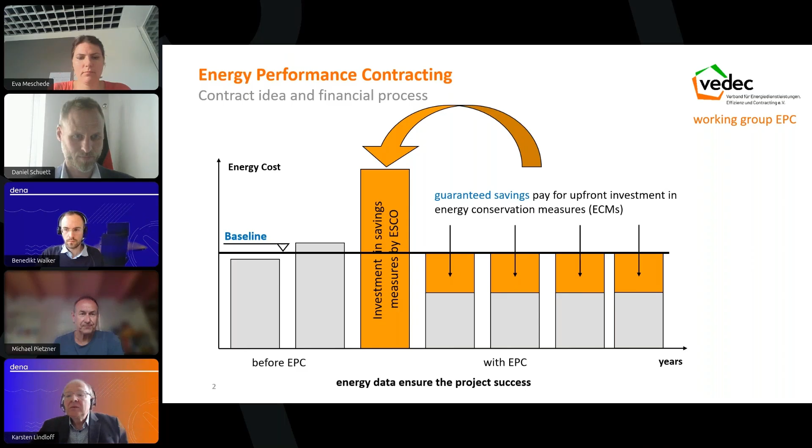And once the contractor has implemented his ECMs, he needs to provide energy reports to show that he has achieved a lower energy consumption and subsequently reduced the energy cost. And in this way, energy data are a very important part to ensure the success of an energy performance contract project. So in general, energy performance contracting can be a tool to implement solutions in accordance with the energy management process as described in ISO 50001.

Which is a clear path and guideline to plan and implement energy conservation measures. It's an organizational process, and for me, one of the benefits of this process is that it is clearly highlighted that it's not only the technical staff of the facility that needs to implement this process, but also the management that must be included in the process development. And I think that's the one part that ensures the sustainability of this kind of process.

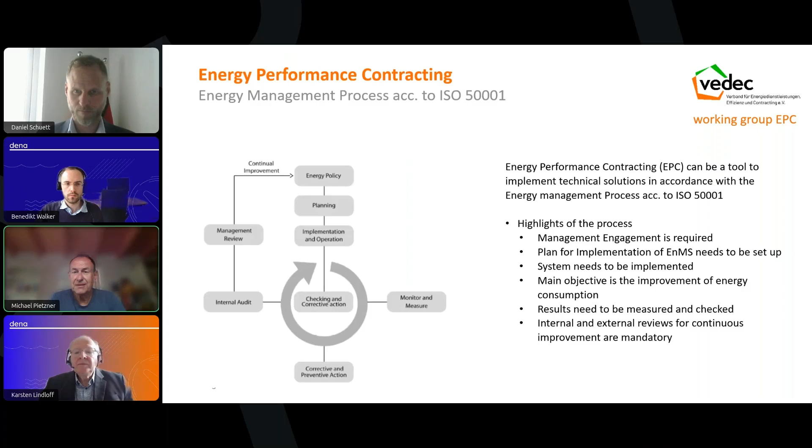So energy performance contracting is also making use of the PDCA cycle of the ISO 50001. So plan, do, check, act. So the contractor comes in, does a study, plans measures, implements the measures, trains the personnel on site, the facility management people. Afterwards, he has to check whether he has achieved the goals he has set for himself. He needs to take corrective action if necessary. And on this part, energy data are a very important part to see whether he has achieved his goals or not.

In some cases, he might also be able to take preventive action. And afterwards, he can see if he can optimize the process, if he can further reduce the energy consumption, and that's the main part of this cycle. If I look from a customer's perspective on an EPC project, the situation shows itself as follows. As a customer, I should have knowledge of my energy baseline and existing situation of the facility, of the equipment installed. I should know technically and energetically regarding energy consumption and energy cost, where I'm standing.

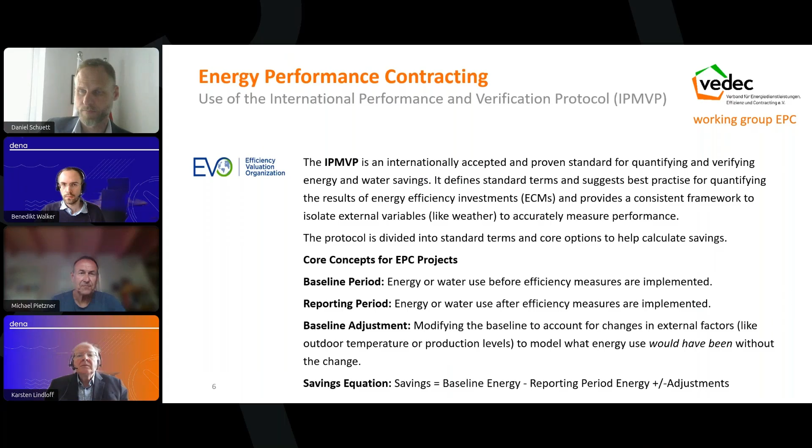Basically, the IPMVP provides 4 options for measurement and verification. I'll go quickly through them. Option A is key parameter measurement, which combines engineering calculations with spot measurements of key parameters. One of the simple cases where it could be used is a lighting retrofit. Now, I implement maybe thousands of lighting panels in a facility, and I can't provide a meter for every lighting equipment or every rack where lighting is going. So I could make a spot measurement of the lighting panel. If I have implemented, for example, LED tubes which should have a power of 18 watts, then I can make a spot measurement to validate that the system really has 18 watts.

And to define the energy savings in kilowatt hours, I can use historical data on how many hours the lighting system will be in operation throughout the year, based on whether it's 1 shift operation or 2 shift operation, and whether I have daylight influence in the facility or not. Then I can put in the figure of how many hours per year the lighting system will be operating. So it's an estimate based on data and engineering judgment. Subsequently, I can multiply the wattage with the hours, and then I have the savings in kilowatt hours.

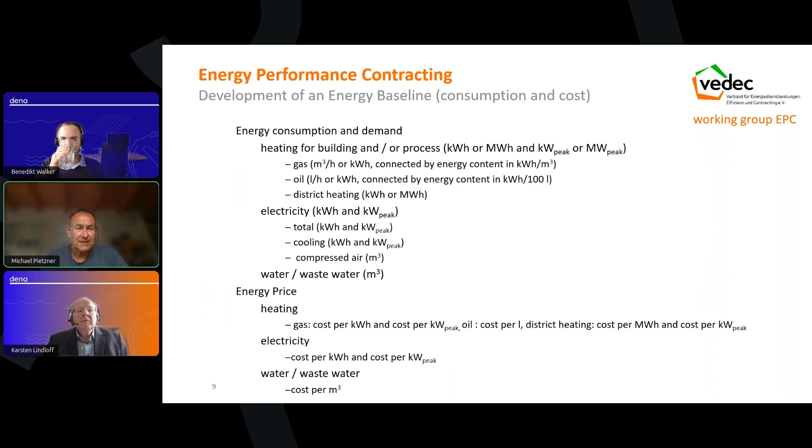And besides heating, I usually use electricity, and in the baseline yearly, it's interesting to know the total electricity consumption, and in some cases also which part of the electricity consumption goes into cooling, which into compressed air. And there might also be a project where water or wastewater could be a part of the project. Subsequently, I have energy prices for heating, consumption and demand, electricity, and water, wastewater.

So if I develop an energy baseline, some general considerations for the beginning. Data need to be for a specific period, as already discussed. So basically, it should be for a year. When the consumption of several years varies significantly without known reason, the average of these years could be taken. In the beginning, data should be available at least monthly. If not available, annually will suffice, but the more detailed the data are, the better the situation is also for making savings calculations for the ESCO.

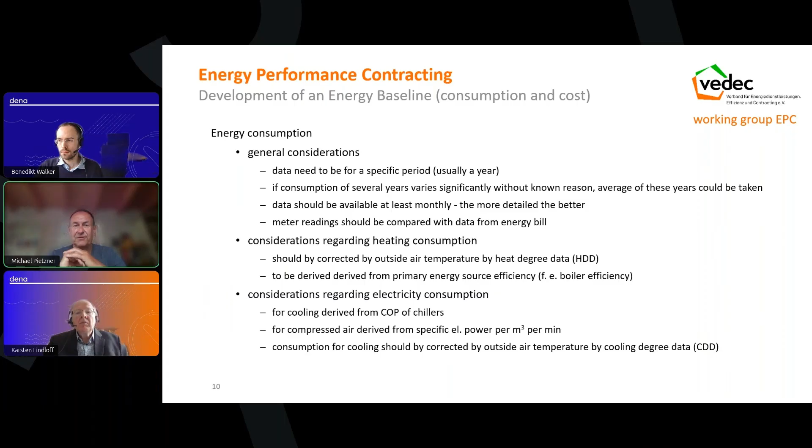And if I take data from installed meters, I should always compare them with data from the energy bill to validate that my meter readings have been correct. Regarding heating consumption and cooling consumption, data should always be corrected by heating degree data and cooling degree data to ensure that I can compare data of one year with future data for another year for the savings.

Well, energy demand, if it's applicable, should also be taken into consideration for a specific period, and these data could be derived from the energy bill or could be read out from installed meters if there are any installed, and you have insight and access to the meter.

The energy prices, from my point of view, to build the energy baseline could be derived from the latest energy bill and then should be used to build up the energy baseline by multiplying consumption or demand with the cost. And these energy prices should also be used to determine the energy cost savings by the ESCO, so that changing energy prices don't have any influence on the energy performance contract.

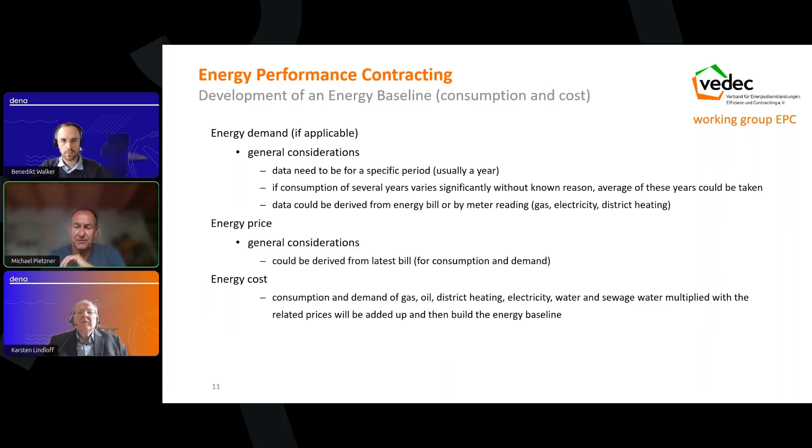If I develop an energy baseline and want to determine further savings achieved, some thoughts up front. Are submeters for systems already installed in the building? Does a building management system or energy management system collect the data and store them? The question should also be answered: where are meters installed and what do they measure? And is a meter scheme available?

Well, because submeter data help build a solid baseline and enable us to calculate and estimate more accurate savings. And they also ensure that an ESCO cannot overestimate his savings. And if no submetering is available, then the ESCO should develop a methodology to determine his baseline for single measures like air handling units, to have a solid baseline for estimating his savings.

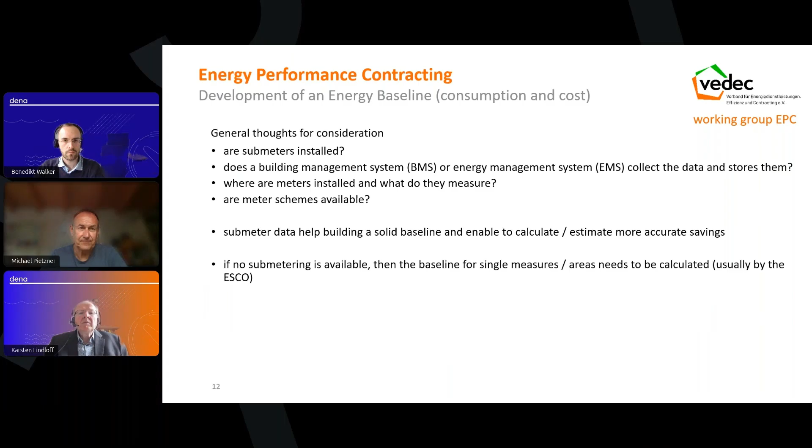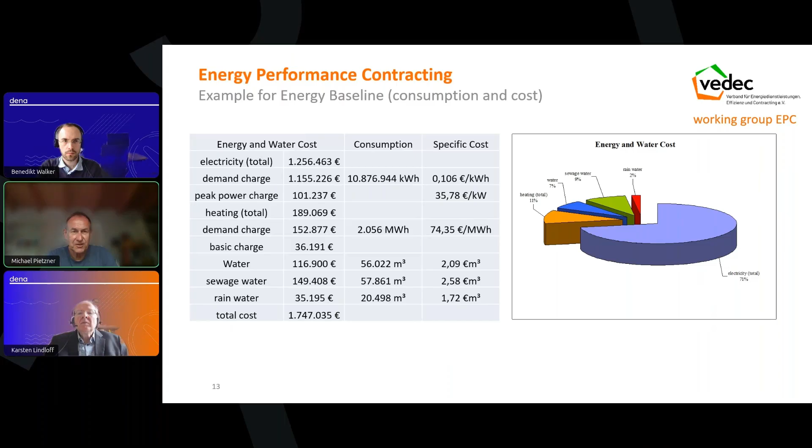But the question is now, where does the energy go? If I talk about electricity, this is another example, not the same facility, but now I'm looking from the perspective of an ESCO, and I would like to know where the energy is going, so that I can see where I should start with thinking about energy conservation measures. Well, in this case, we have tried to determine where the electricity is going.

So in this case, quite a lot of air handling units are operating. I have a compressed air system operating. I have a lighting system. I have a cooling plant. I need electricity in some cases for heating. I have a commercial kitchen in the plant. There is some consumption going into social spaces. And I know that basically nearly 50% of my electricity consumption goes into production.

So, if I'm not a very specialized ESCO, I usually won't go into optimizing production machines. So my area of operation would be handling units, compressed air, maybe lighting retrofits. Maybe I can do something on cooling too, but it will not have a very big impact. But I now have a clear idea in which areas I could try to implement energy conservation measures.

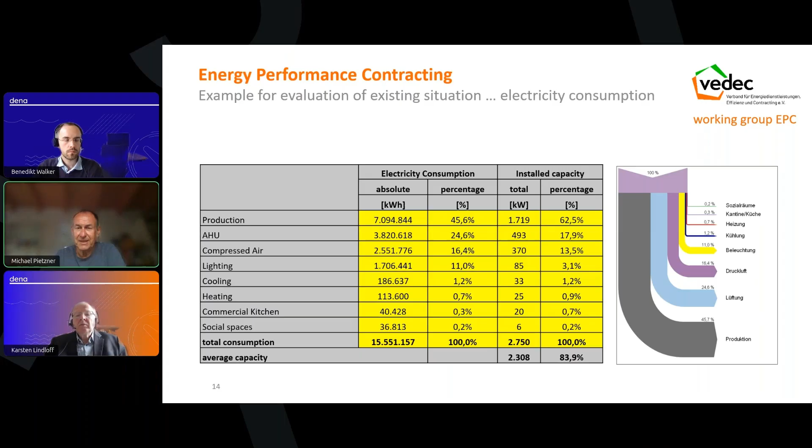And also, I would like to know not only my annual consumption. I would like to know at least the monthly consumption, so I can see is there an influence. I could see, for example, do I have much electricity consumption only in summer, or is it more or less constant throughout the year?

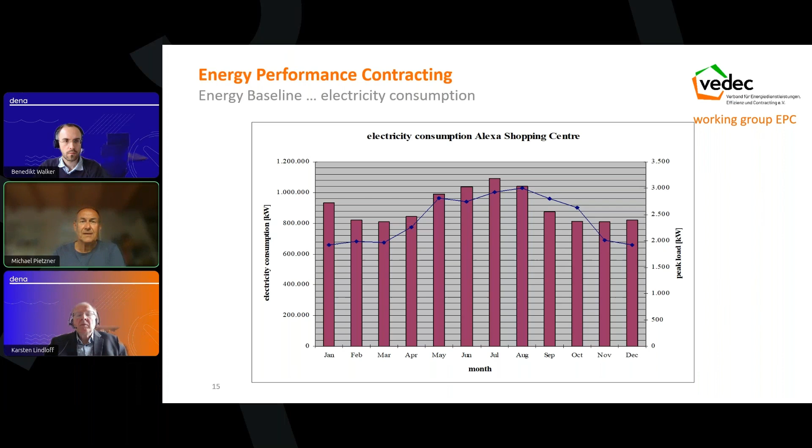And also the load curve, which in Germany can be achieved by asking the energy supply company to provide these 15 minutes data. I can also evaluate them. And in this case, we've tried to put them into context with a number of customers in this shopping mall to see if there are any interdependencies between these two parts.

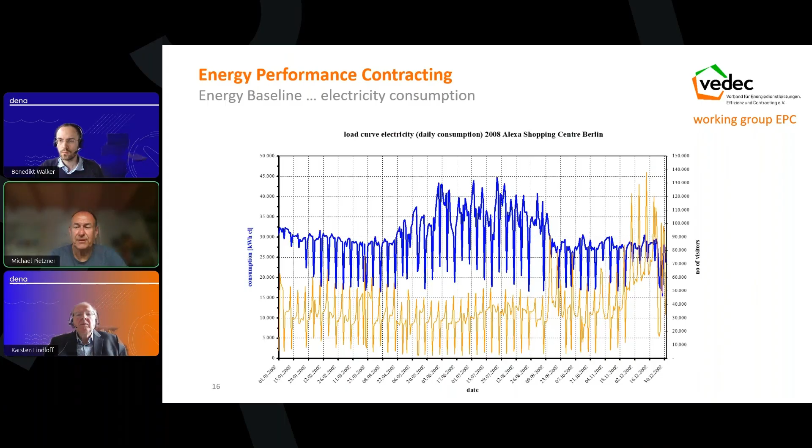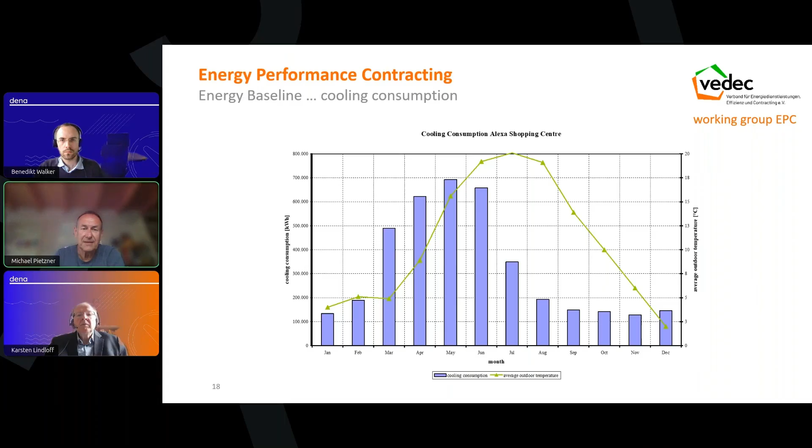Regarding cooling, I can also make a comparison of outside air temperature and cooling consumption. And I need to ask myself, why do I have a higher consumption in May and June than in July, where I have the highest outside air temperature? What's the reason behind this? Is there a need for adjustment of the control systems, or maybe is there a dependency on the number of customers in the shopping center?

And I need to collect supporting data for developing ECMs and saving systems. I need to know what the data of the central cooling plant, of the heating plant are. So what is the installed capacity for cooling, for heating? What are the operating times of the building, of the areas supplied?

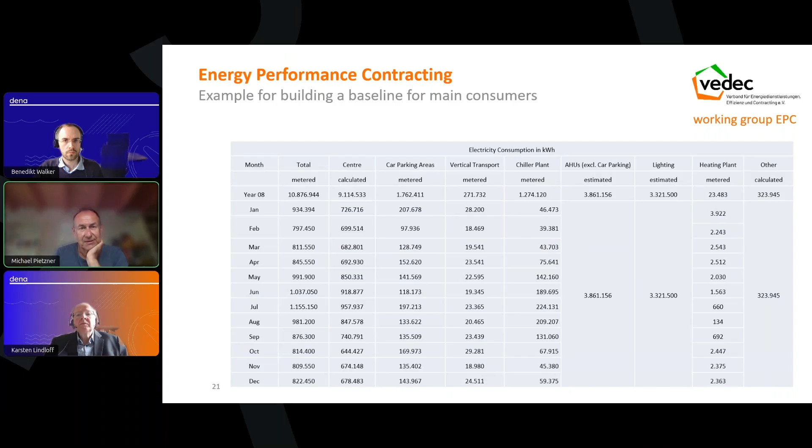And to build up a baseline for main consumers, we have collected a lot of data. In this case, some data were metered, some data had to be estimated. And subsequently, I can see where my energy is going, as already discussed, and then can decide where I should start looking for energy conservation measures. And if I visualize this, it makes things easier sometimes because I can see where the energy is going.

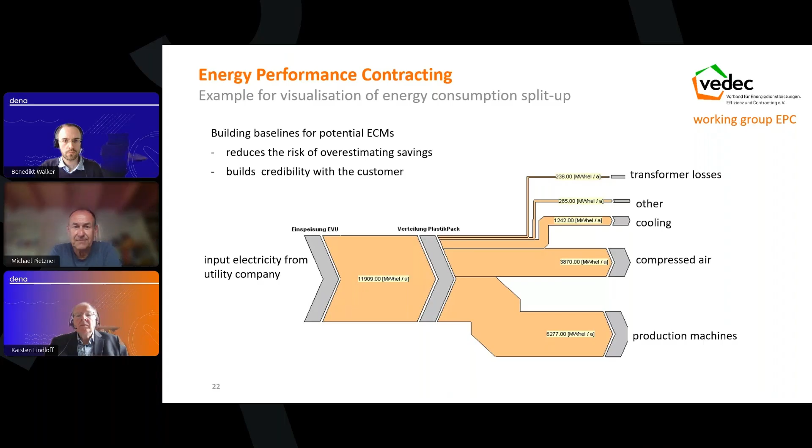And if I'm talking about air handling units, which are installed in a lot of facilities, usually I know from the machine, there's a sign providing data about the supply and return airflows. I might know from the sign on the system the installed cooling capacity. I will see is a variable speed drive installed, is a heat recovery system installed. I know the power of the fans. I know the operating time.

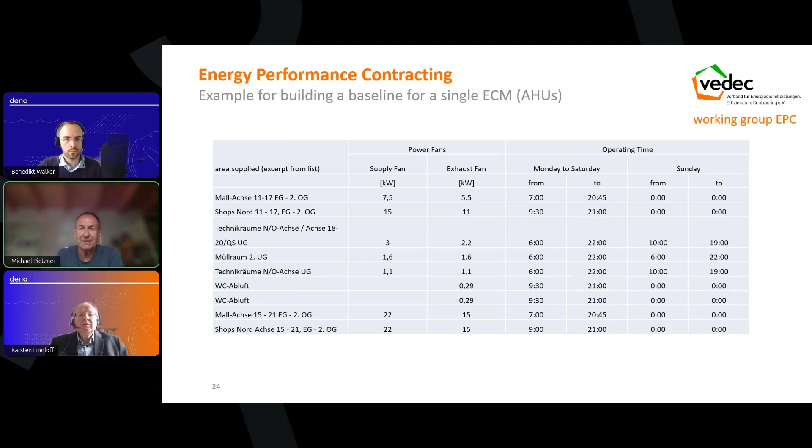Usually, I will know the operating time of the systems, and from this I can calculate the electricity, heating, and cooling consumption for each air handling unit, and then I can add up all of them to have the total consumption of electricity, heating, or cooling for air handling units. And now I have a baseline from which I can calculate savings on air handling units.

Michael, could I remind you of the time so we can have a short question and answer session? Thank you. Yeah.

Just a few more slides on the use of meters and submeters for measurement and verification. In this case, for electricity, we have built a baseline, an average over several years from the meter, and afterwards we have measurement after implementing the energy conservation measures, and subsequently from the difference between those meters, the energy consumption savings multiplied with the energy prices, we have the energy cost savings.

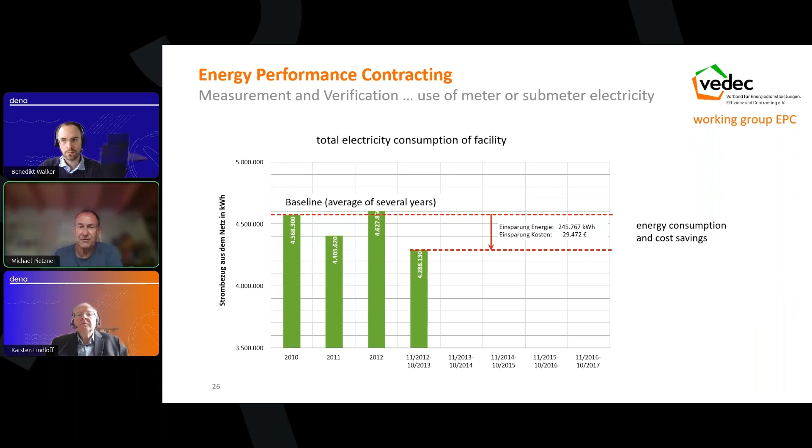We could use a similar process for the heating consumption, and this is also the use of meters. But we have built up here, each of these columns shows the consumption during the last 12 months. So we don't only have the baseline, but we see each month where the energy consumption is going.

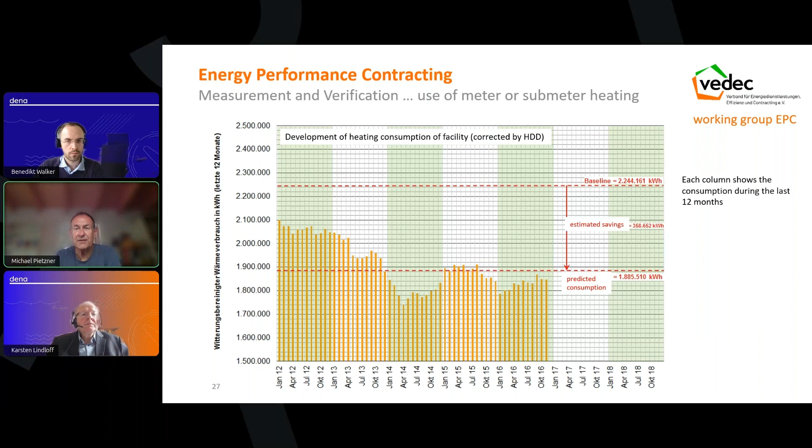And as a contractor, I also see, am I on the right path? Have I already achieved my savings? Do I need to take countermeasures if I haven't achieved my savings one month? So I don't need to wait till the end of one year to determine whether I have achieved savings or not. And I could use this also for adding up consumptions of multiple buildings to see, am I on the right path?

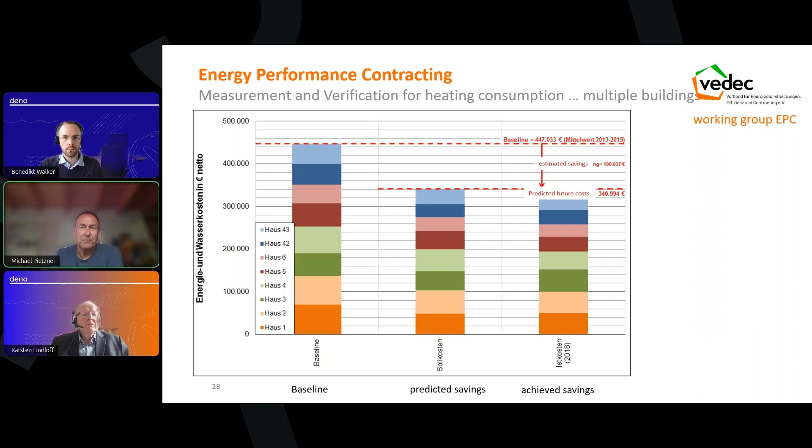And because we're talking nowadays also about implementing new supply systems using other forms of energy than before. For example, in the past we had a cogeneration plant and gas boilers in operation for providing energy for heating purposes. And as part of an ESCO project, now a heat pump is installed and should take over most of the production of heating. And I want to know, is it going well? Is the heat pump included in the process as I have designed it?

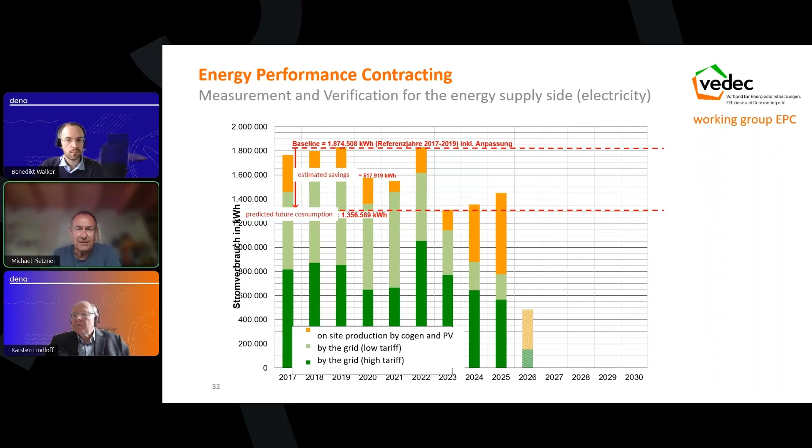I want to see maybe the same for buildings. Where do I have my energy savings achieved? And if I include photovoltaics, I want to see, are they providing the amount of electricity as predicted?